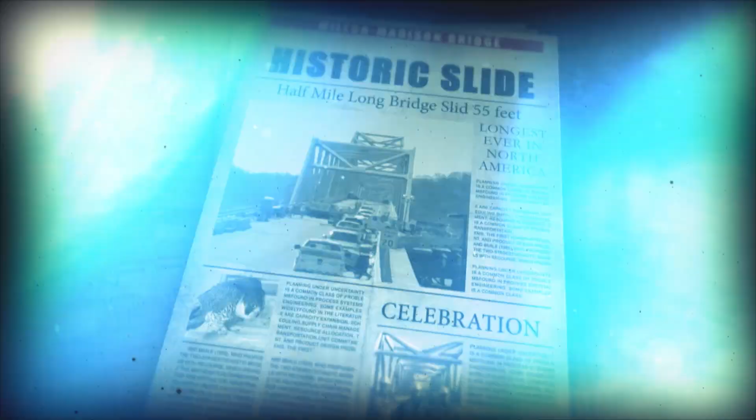Tucked below the limestone bluffs midway between Cincinnati and Louisville, you'll find one of the largest national historic landmark districts in America. Madison, Indiana was established in 1809 along the superhighway of the time, the mighty Ohio River. As the United States expanded to the west, commerce from flatboats and paddle wheelers grew Madison into a major transportation hub. Its wealth created investment in many finely built homes and businesses that have survived the several booms and busts of a river town economy.

Madison is one of the most important historic towns in the United States, on par with Savannah and Charleston, Nantucket, places like that. And you can walk around and just kind of immerse yourself in American history. It's all around. You can reach out and touch it in any of our historic buildings.

Founded in 1809, it has buildings as early as 1817, and quite a few of them from the 1820s to 1840s. Our Main Street has a beautiful collection of 19th and early 20th century commercial buildings. A lot of communities have lost historic buildings in their Main Street, and you get gaps, sort of like gap teeth. Not here.

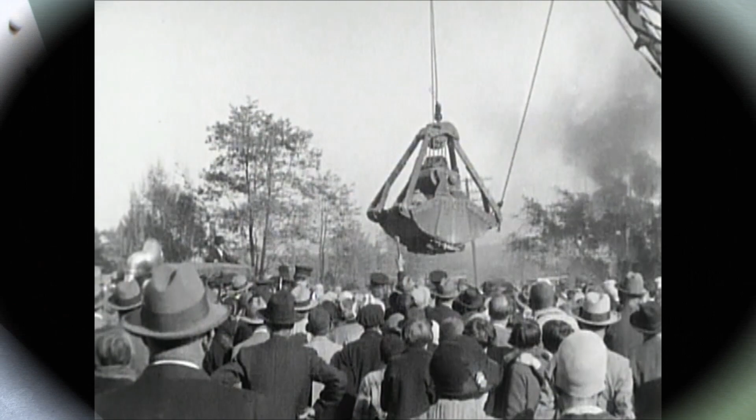200 years after its founding, and despite protections provided by historic landmark status, the future of Madison was threatened. The bridge connecting the community to Milton, Kentucky, its more rural neighbor across the Ohio River, was deteriorating rapidly and in desperate need of replacement. Prior to its construction in the late 1920s, ferry boats were the only way to cross the Ohio between Milton and Madison. The bridge opened to traffic with much fanfare on a cold December day in 1929.

100-year-old Riva Webster was there. There's the one. There's the one that we're on. Riva represented Milton in the Queen of the Bridge pageant and parade. Let's see, I was 16. I was in school. I was in high school. We were called the princesses. They let us call ourselves that.

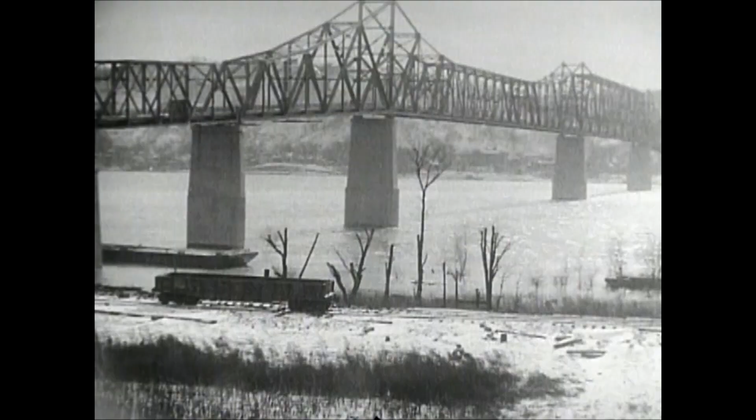We hung on for dear life, I tell you. It was snowing, and it's been snowing and sleeting. I can't even see how attractive I am because all I can see is just a little round face that was looking like this. But anyway, we had a good time, and it was wonderful. But we were miserable.

Throughout the following decades, the bridge created new opportunities for residents of both states. Madison enjoyed new customers for its retailers, restaurants, and theaters. And Kentuckians from Milton now had easier access to the jobs, goods, and services a larger neighboring town could provide.

Well, I grew up in Milton, Kentucky. I grew up on a farm, so I'm a Milton guy. Milton's a small town. Trimble County is very rural, a lot of tobacco grown there, a lot of farming. It's a great place to live and raise a family, but the two communities are very, very closely tied together for commerce, jobs, and for everything you can think of.

That's why this bridge is so important to Madison. I mean, if you can't get across here, you've got to go about 25 miles east to Markland Dam, or you've got to go about 35 or 40 miles west down the river to Louisville. So this bridge was very important to us.

By the 1990s, transportation needs had changed. Vehicles were wider, heavier, and moved faster and more frequently across the Ohio. The bridge that helped commerce flourish between the two states now began to hinder it. The condition of the bridge was deteriorating. Its functionality had been a problem for a long time.

It was built for horse and buggies and Model A's. And with the new cars and trucks especially, two semis could hardly pass without hitting mirrors. And it was becoming a big problem for industry, taking their goods and services north or south. The communities understood they were losing money economically. It was unsafe. It was a structurally deficient bridge.

For 2 decades, community leaders advocated for a replacement bridge at a time when money was becoming more scarce for state transportation projects. In the beginning, more than not, I was told, Jack, it's too expensive a project. It's a huge project for a small community to be successful with. And my answer to them was, it is, but we're going to work toward this.

Nobody likes to pay taxes. But most citizens understand that these are critical needs that our communities have. Everybody wants to travel on a good and safe road, but people want you to invest their money wisely, and I think that's incumbent on people like me, politicians who make these decisions, to say, let's go where the need is greatest, or where the opportunities are greatest for future growth, and let's make our investments there. And if we continue to do that, I think people will be more than willing to make those investments with their dollars.

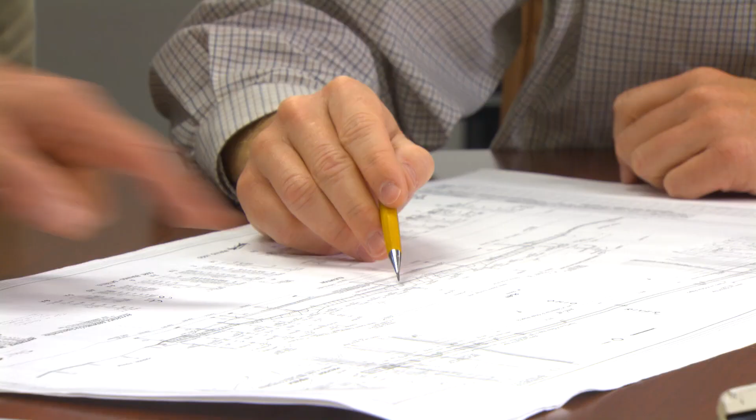Back in about June of 2008, Michael Baker got involved early on. We were the consultant on the bridge type selection and environmental study. That was the part of the project where you look at all the different alternatives up and down the river, try to figure out what makes sense, and there was a lot of community involvement at that point in time to figure out what the community's needs were.

In addition to transportation officials at the table and groups like Historic Madison locally, there was the National Trust for Historic Preservation, there was the National Park Service, and then there were local people who own historic homes and have businesses and investments in the historic district that also had the opportunity to participate.

We did not want to lose that designation. That was a key thought. We're very proud that we are one of the largest in the country, and we didn't want that to be damaged. We would alternate those public meetings, one on the Kentucky side, one on the Indiana side. So everybody felt like they had ownership and they had something to say about what we would have at the end of the day when the bridge was built.

In the midst of the design and planning of the replacement bridge project, the American economy suffered its largest financial crisis since the Great Depression. Banks and businesses failed, unemployment rates doubled. In an effort to stem the tide of further job losses, the federal government enacted the American Recovery and Reinvestment Act of 2009. The economic stimulus package included over $1.5 billion called TIGER Grants for shovel-ready transportation reinvestment projects.

As we were working toward the final throes of how do we pay for the project, we decided to jointly, the two states working together, submit a request for Tiger program funding, and we were successful to the tune of $20 million.

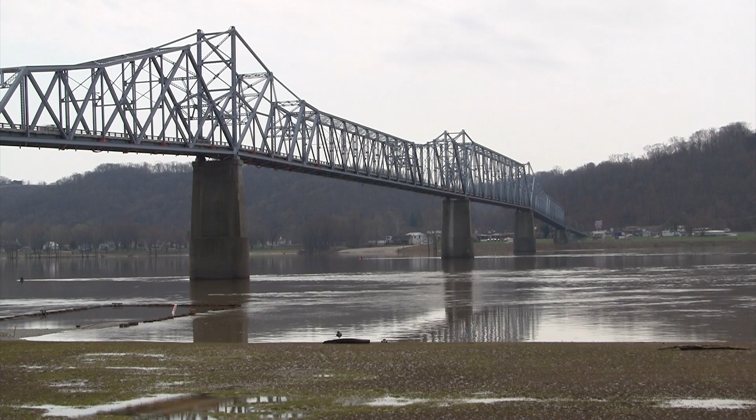A lot of times there's a lot of federal requirements that go along with these projects, and a shovel-ready project is a project that's already met those requirements, something they're ready to start the bulldozers moving and start moving the dirt. All those steps had already been taken. We'd already done a lot of the public hearings, environmental impact, the critical need for the structure to be replaced, so it all just lined up that we were ready to go.

The project needed to go design build in order to meet the requirements of the Tiger Grant. Essentially, it had to be substantially complete in 2012. A design build project is a little bit different than a typical bid build project in the sense that the design is not 100% complete when the contractor gets a hold of it. The theory behind design build is that the designer and the contractor come together to work out a more efficient way to do things.

Even though Kentucky was the lead state on the bridge, Indiana had a design build contracting authority, which Kentucky did not. So to help expedite the project, we were able to bid the contract and actually take ownership of that. So it was a cooperative effort between both states in that we were able to do something at that time they couldn't. So we stepped up and helped them through that process.

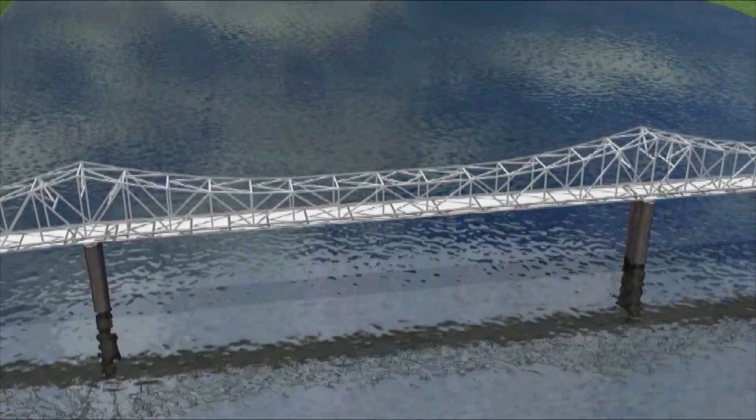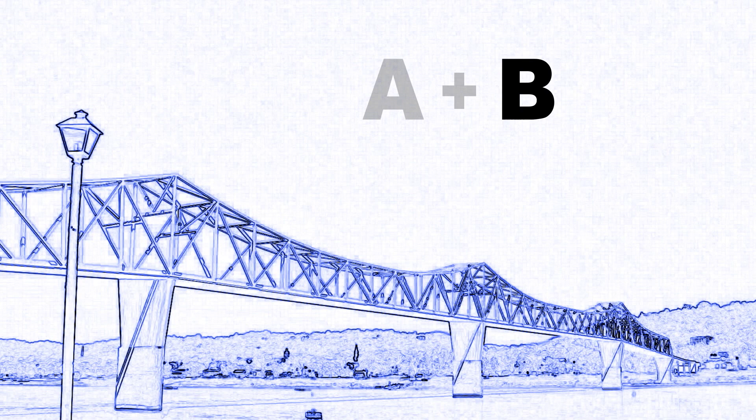By 2010, enough of the design was in place to receive bids from potential contractors. The winning bid would be selected using the A+B evaluation technique. The A portion being the cost of constructing the replacement superstructure while rehabilitating the 1929 piers underneath. The B portion of the bid would include a per-day bridge closure value of $25,000, limited to 365 days of total closure. So it was very important in this bid to get the least amount of closure because it would be the least impactful for the motoring public and the communities on both sides.

It is crucial in a historic town or a historic building that it be used and that it be active and that whatever goes on happens continuously. 18 months of closure, maybe half of the market could not get here. They might permanently lose customers. We were terrified about that possibility. We thought that was very frightening.

We had 5 bidders on the project, and of the 5 bidders, there was only one that chose to bid less than the 365 days of closure. That contractor was Walsh Construction. It was a joint effort between Burgess and Niple, their subcontractor Buckland and Taylor, who took care of the truss design, and Walsh Construction that made up the design build team.

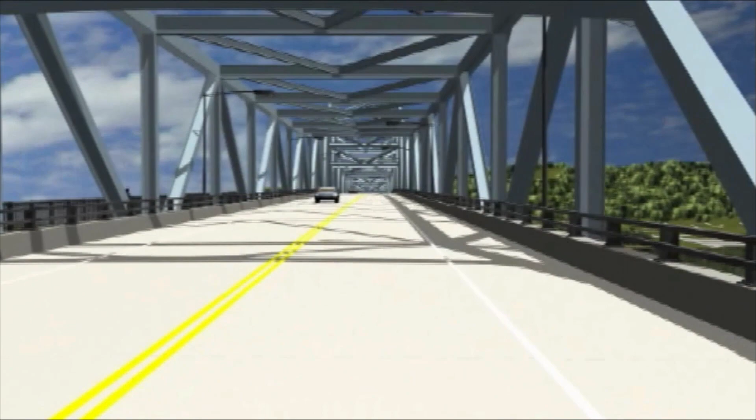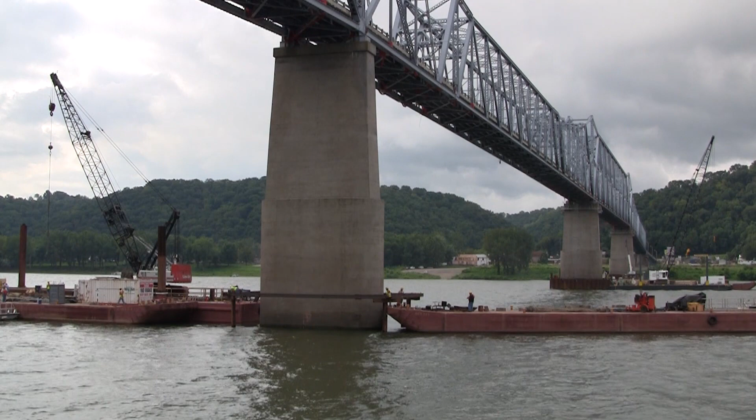An innovative plan was proposed by the Walsh team. In order to maintain a flow of traffic throughout construction, a new superstructure would be assembled on barges along the shore and then lifted onto temporary piers alongside the existing bridge. The 1929 span would remain in service while its piers were strengthened above and below the Ohio River.

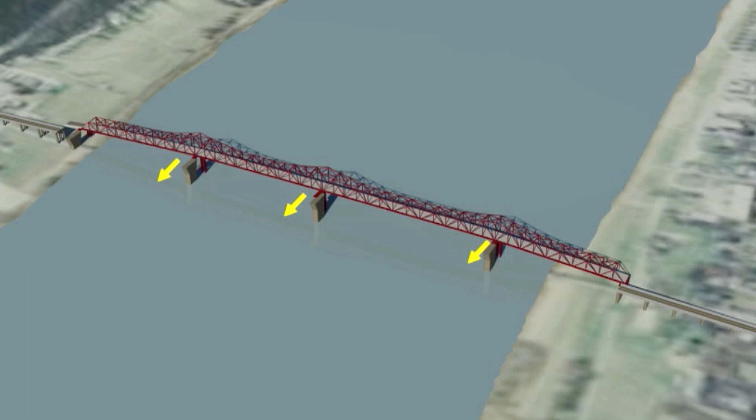When the new truss and approaches were complete, traffic flow would switch to the new bridge and the old one removed to make way for widening of the original piers. Most surprisingly, the team planned to slide the nearly half-mile-long bridge more than 50 feet onto those rehabilitated piers. Engineers called for the Ohio River crossing to be closed for only 10 days during construction.

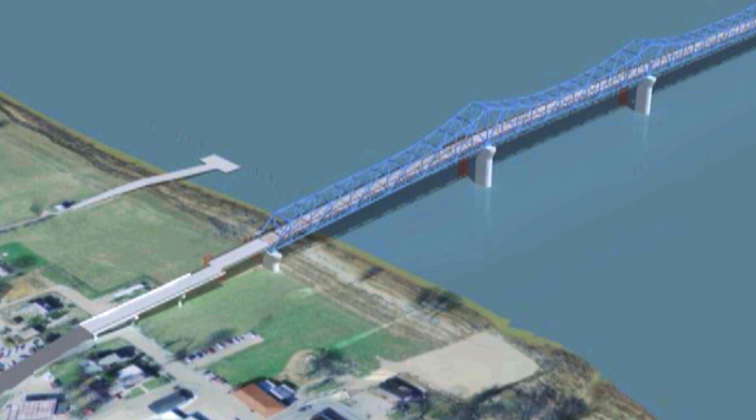We were anticipating a year-long closure. We couldn't believe it. We were ecstatic. I think from an economic standpoint and the local communities, it benefited them the most by doing it this way. And it got us the job, obviously.

With the winning bid in place, ground was broken in the fall of 2010. National Transportation Secretary Ray LaHood traveled from Washington to Madison to join local and state dignitaries in turning ceremonial dirt.

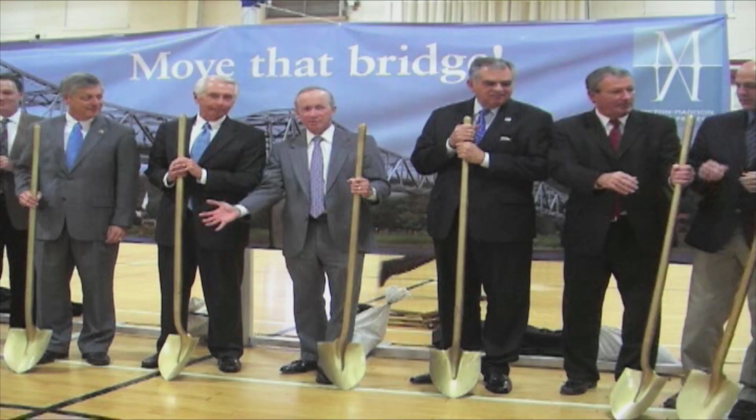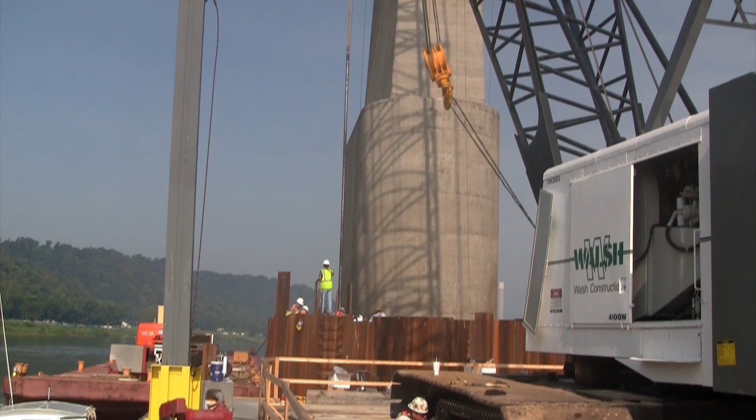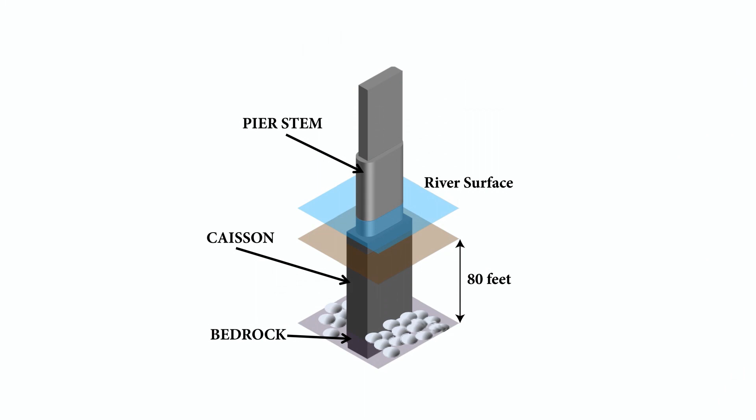The first construction challenge was to rehabilitate the existing 1929 piers. Although solidly constructed, there were problems below the surface. The biggest deficiency of the piers was the fact that the part below the river, which extended about 80 feet down below the river bottom all the way down to bedrock, was unreinforced. And in today's standards, that is just unheard of. And when you actually run the numbers for wind on the bridge or a barge hitting the bridge, it just doesn't work.

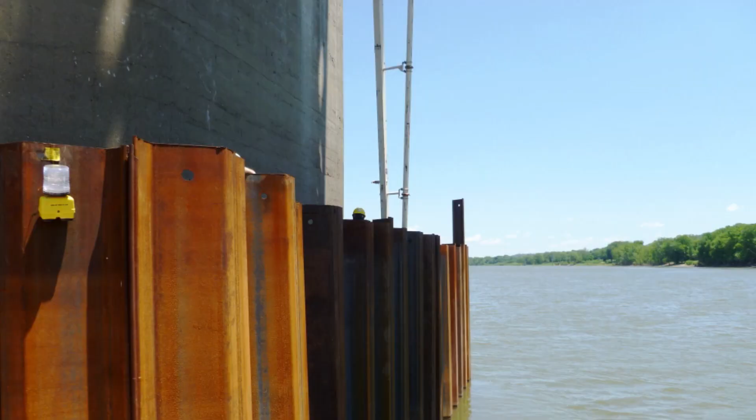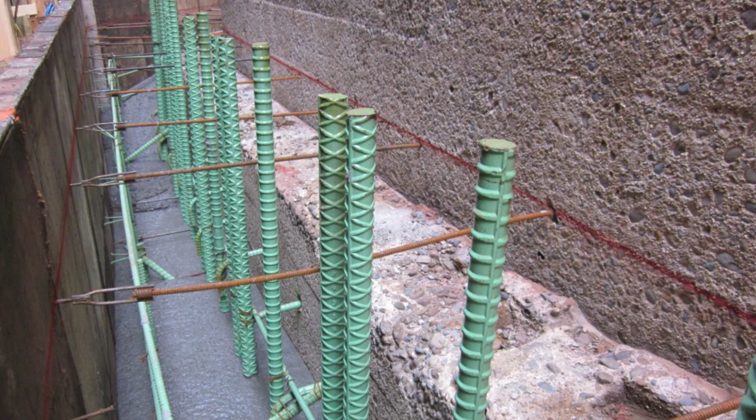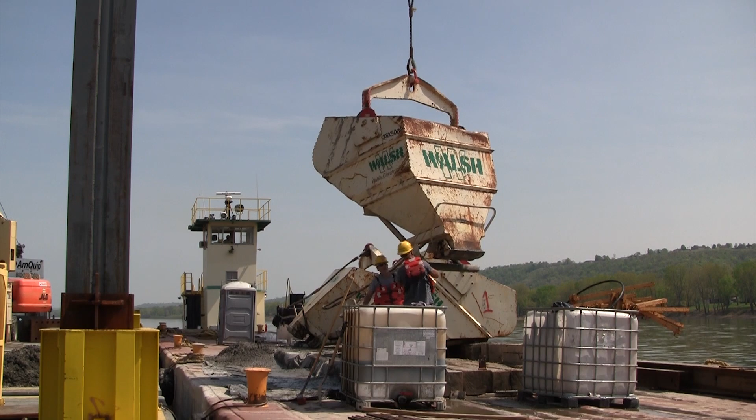Cofferdams were used to expose the 80-year-old pier caisson on the river bottom. Workers drilled holes up to 70 feet deep and inserted bundles of steel rods to reinforce and strengthen the perimeter of the pier's foundation. Additional reinforcement was also added to the pier stem, which reaches out of the water to meet the roadway. Considering you're in the middle of the Ohio River under wet conditions, it's a challenge.

We experienced 8 flood events in the first 14 months of this project. 2011 was the wettest year on record up the Ohio Valley. We really think that we lost in workable days close to 250 days the first 14 months of the project.

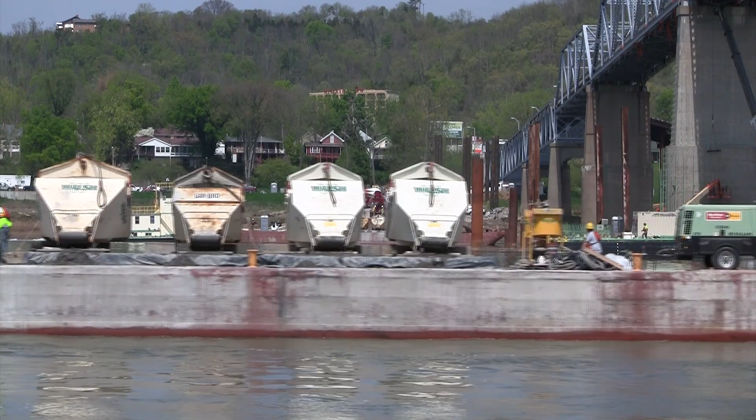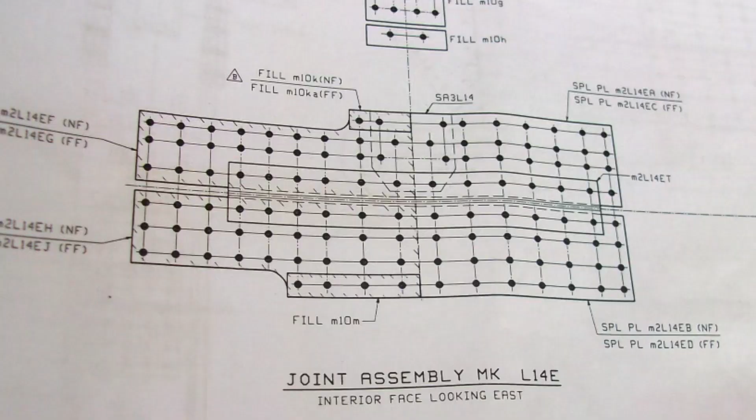Simultaneous to the pier strengthening, work began to design and construct the replacement truss superstructure. As soon as you win the job for a design build project like this, it's all about the time. So that means that right away the contractor's asking the designer, what are all our plate sizes? We haven't designed the thing yet. So a huge amount of effort went into the first couple weeks of design to pin down how long and how thick and how much steel plate you needed for this bridge.

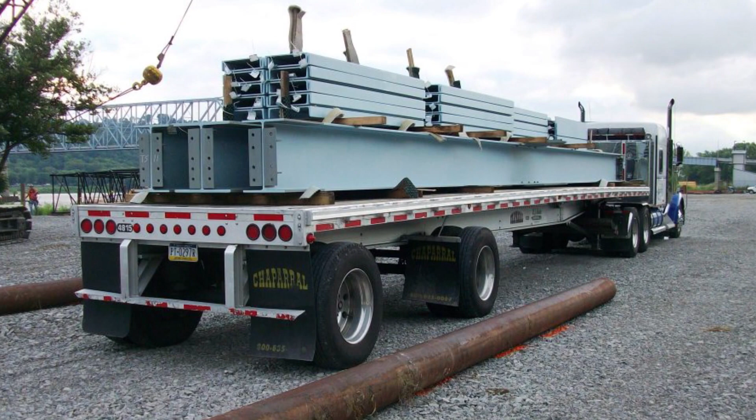Once the steel began arriving in summer 2011, the 2 longest segments of the bridge truss were assembled on barges linked together along the riverbank in Milton. A 600-foot-long assembly was then floated into position and lifted 90 feet above the water using a technology called strand jacking. A series of computer-synchronized hydraulic jacks pulled upon strands of steel cables attached to the 1,700-ton truss. The jack's mechanism alternates clamping and extension cycles to raise extremely heavy loads with precision control.

You just have to be really precise, and you know, the old joke in the industry, we're building a bridge, not a watch. Well, in this case, we had to build a watch to make it work. We want to have this bridge sitting on this temporary pier, and we want to be able to slide it onto the rehabilitated pier. That was what we needed in the end, but before we got there, we had to somehow lift this whole thing and then put it down on something. But we couldn't have anything there to put it down on because we had to lift it past all of this. So the two construction methods were completely at odds with each other.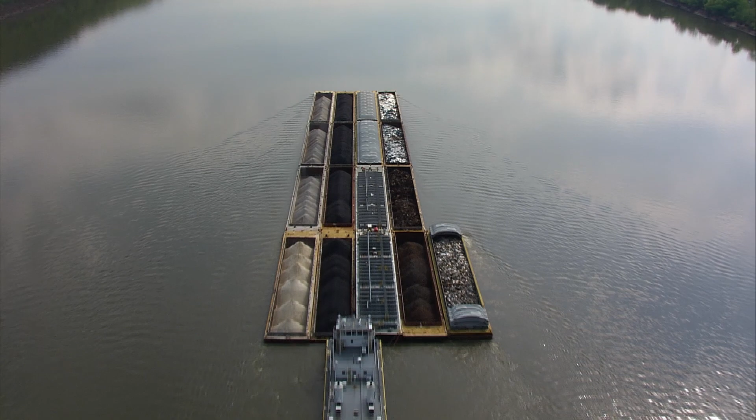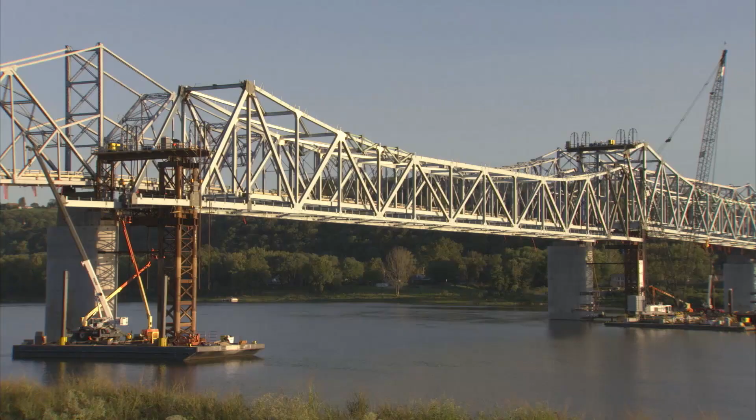Adding to this dilemma were the time constraints of closing one of the busiest inland shipping routes in the country, the Ohio River. At 727 feet, the longest truss segment traversed the Ohio's navigable channel. In less than 24 hours, we had to have the river back open. So we had a process where we lifted that up, and then the crane brought in this massive sliding girder, which itself was 100 tons. And then once it was in place, we were able to lower the truss, let it sit on it, and then we could get the crane out of the way and go and open the river.

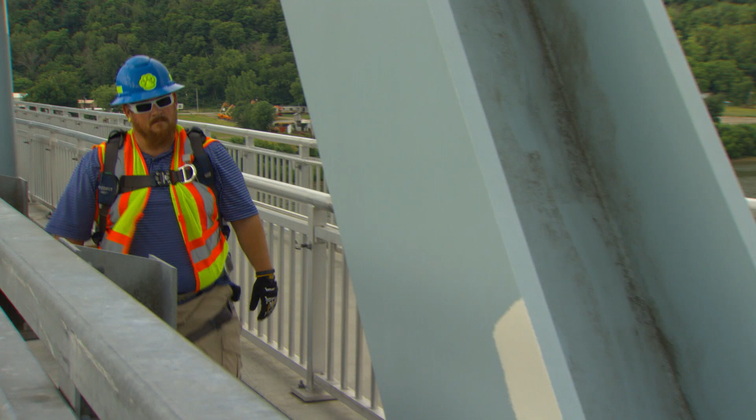Construction of the remainder of the truss continued throughout 2012, all while traffic remained flowing across the original 1929 bridge. Due to the long-term nature of the project and their familiarity from work done in the development stages, engineers from Baker International were chosen to supervise construction. Baker was hired to oversee the project on a daily basis, to do construction inspection, to make sure that the contractor was following the plans, making sure we were getting the product that we were paying for. Baker also placed people on site to manage the project.

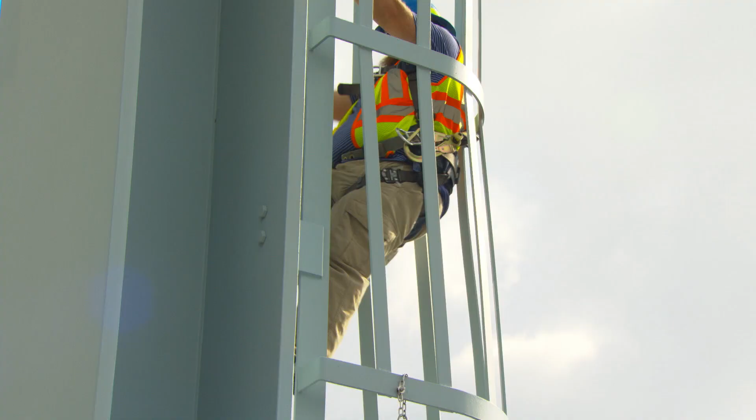So Larry Collins actually works for Baker, but he worked as an agent for INDOT. And when I worked with Larry on a daily basis, I saw him as INDOT. Collins is a Trimble County native who'd recently settled with his family in Madison's historic district when the bridge project was announced. I worked in Bedford, Kentucky, Trimble County, so I knew I'd be impacted by the bridge project. Being my lifeline to get to work, all the family lives in Trimble County, we live in Madison.

I was ecstatic that I still have the bridge. I can still traverse back and forth across the river and only be closed for the short duration. So both things just excited me, to be working on it and being in the community. It was vital to have that bridge open.

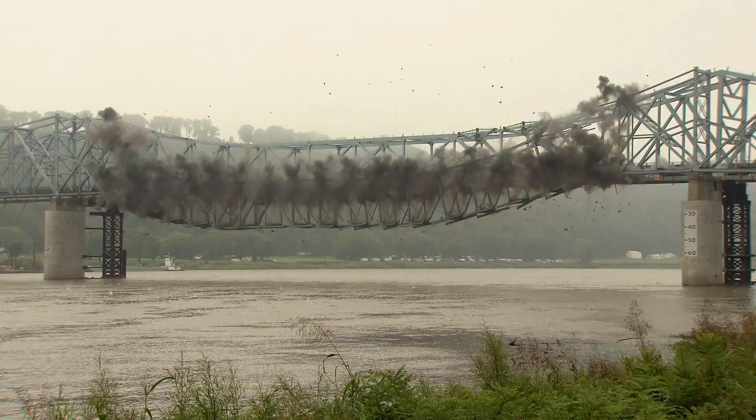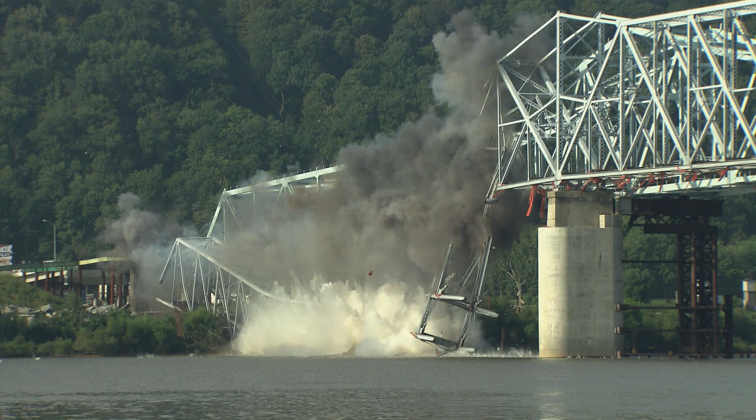The project's next phase, removing the 1929 bridge superstructure, proved to be the most visually spectacular. Once the concrete was completely removed, using explosive demolition cutting charges, it's a process of just moving along in a certain order to bring it down. Yeah, we were 15 feet between bridges. So for the most part, it did pretty good. We had a few little nicks here and there, no structural damage whatsoever.

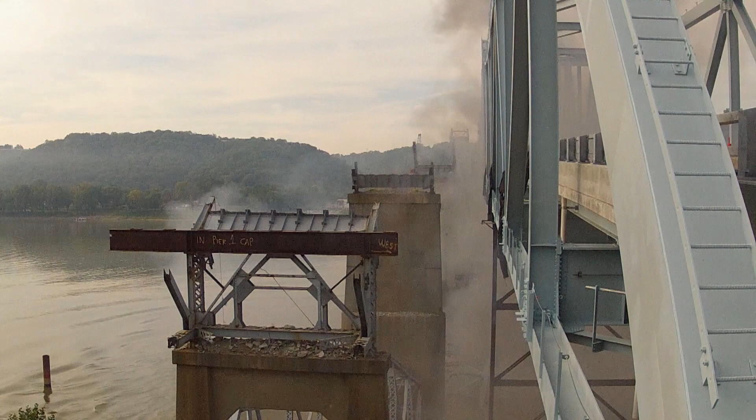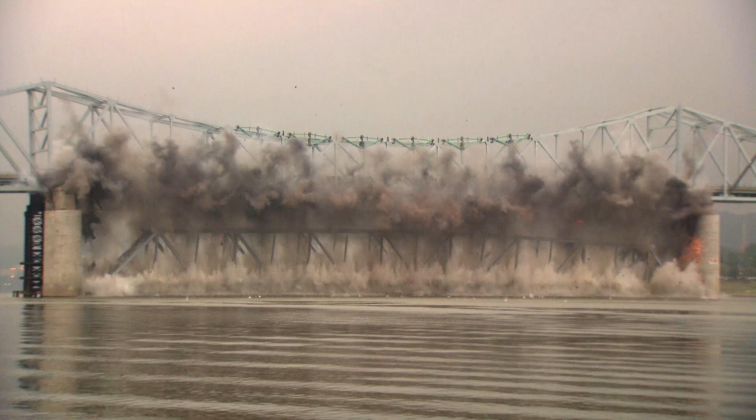Along with guarding the new bridge from damage, the project team partnered with Kentucky Fish and Wildlife biologists to protect a family of rare peregrine falcons who had chosen the bridge as a nesting site. The female at that point in time, I think she was on young chicks. She definitely noticed. She kind of got up and looked around, and I think she may have thought a thunderstorm was coming because she just hunkered back down on the chicks, and everything was okay.

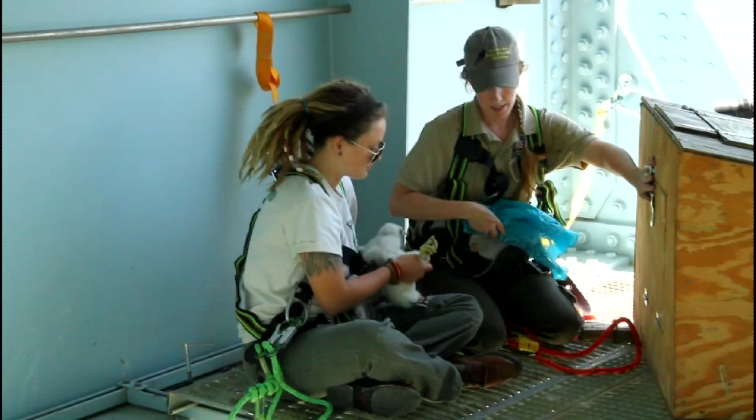With just 13 peregrine falcon pairs in Kentucky, losing the Milton-Madison nesting site would be a major setback to the species' recovery efforts. I am sure at the beginning Walsh was wondering what this meant for them, but as time went on, we found that the company really fell in love with the birds, and they went from being cooperative to really going out of their way to accommodate these birds. And actually every single year that the bridge has been reconstructed, there has been successful nesting on the bridge, so it worked out great.

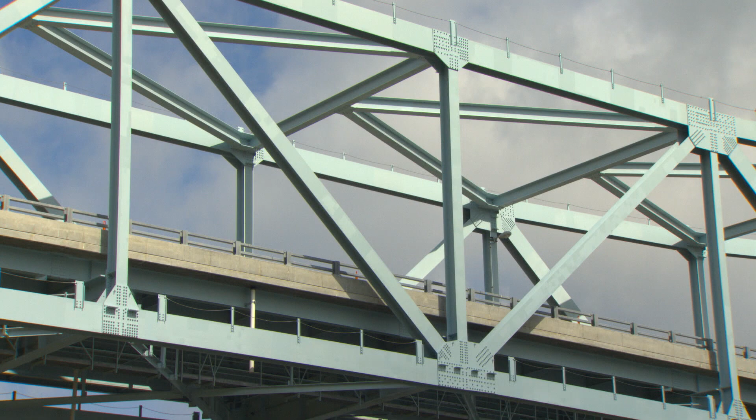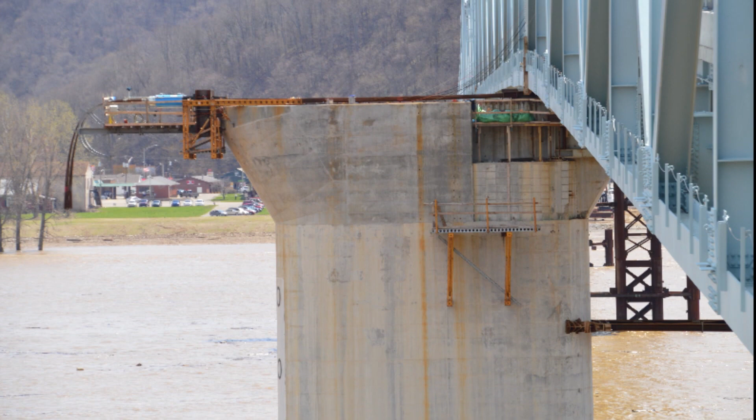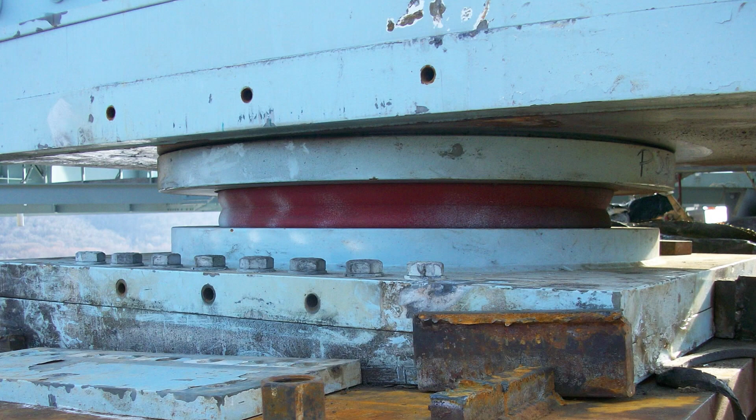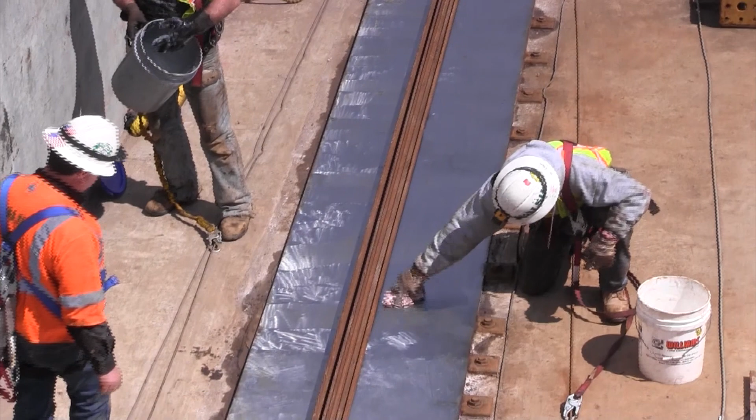As falcon nesting season began again in early 2014, preparations were already underway for the final construction milestone. The 2,400-foot superstructure, which is nearly half a mile, would be slid laterally more than 50 feet onto the newly widened caps of the rehabilitated piers. Engineers plan to utilize the same hydraulic strand jacks as were used to lift the pre-assembled trusses onto the temporary piers. This time mounted horizontally, the computer-synchronized jacks would pull a harness strapped to the truss bearings. These bearings basically allow the bridge to move as it expands and contracts with temperature variations. The bearings would slide on a lubricated Teflon pad across a polished steel surface, carrying with it the 30 million pound bridge.

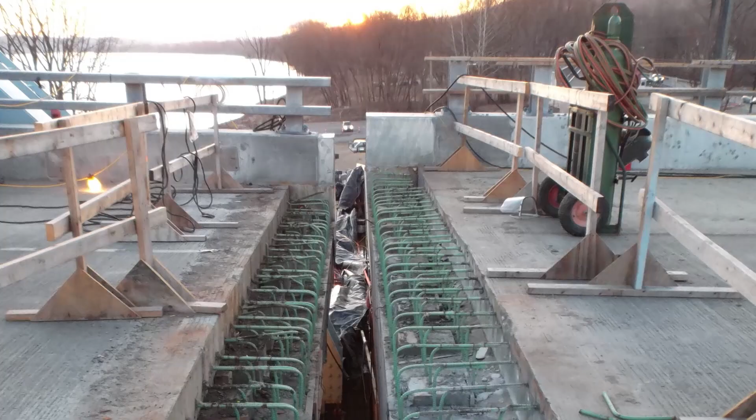During installation of the harness and just days from commencing the slide, the crews encountered a setback. The base plate, the lower pad, slipped out during that process, allowing the bridge at that corner to drop 10 inches. Well, obviously at that point we had to close the bridge down, something we didn't want to have to do by any means. For the first time, area motorists faced an extended bridge closure and an hour-long detour to reach the opposite side of the river. Had the bridge been replaced by traditional construction methods, the communities would have had to endure such a detour for a year or longer.

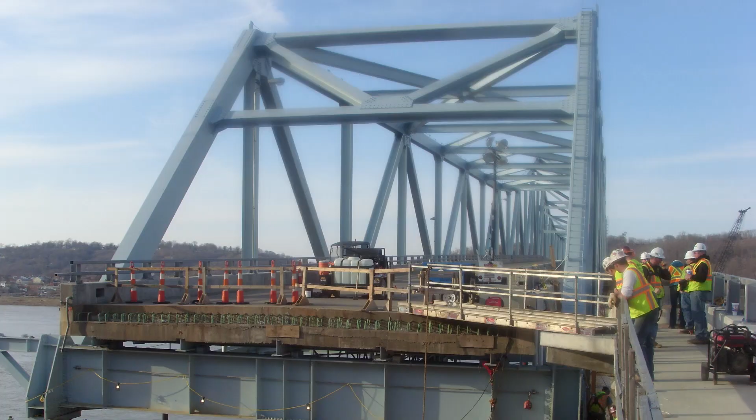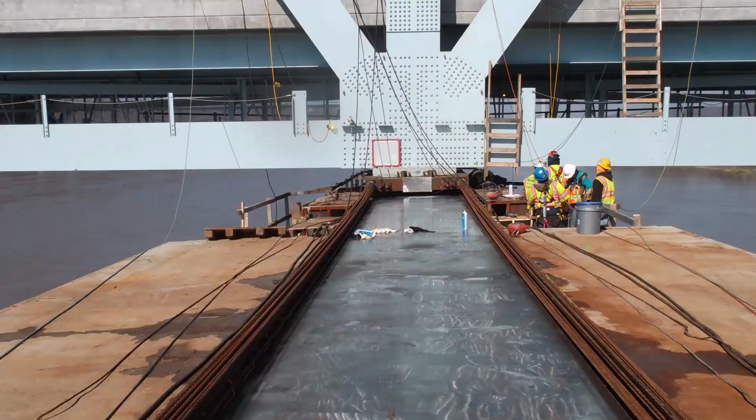I would like to say, oh, we'd have made it through that, and we would have, but it would have been terrible. We would have had a lot of our downtown businesses closing. It would have been pretty devastating to our community. So, working together with our designers and working around the clock, we were able to reestablish that piece back in 12 days. And then to ensure that we had no more problems with the harness system, we took a few extra days, with the bridge still being closed, we knew it was an inconvenience, to make sure that we would not have any issues during the slide itself.

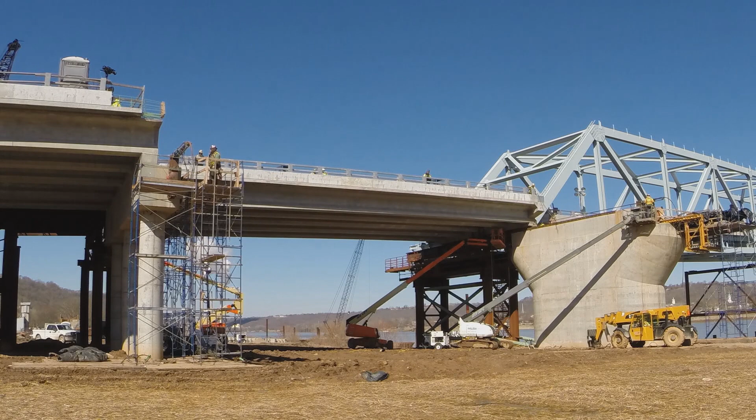With the bridge still closed to traffic, a 100-foot approach section of finished roadway was slid into its final position on the Milton shoreline. But this was just a precursor for the historic slide, the placement of the nearly half-mile-long superstructure. Sliding a bridge is typical in this industry, but not to this scale. And sliding a truss this big seemed difficult to everybody but VSL Corporation, the people that specialize in lifting and sliding. And they always looked at it as just another day at the office.

Everything worked so well that the anticipated coefficient of friction between 8 and 15% ended up about 3% during the slide. With lower than expected friction on the sliding girder and with tailwind gusts of up to 30 miles per hour, sliding operations were halted after moving almost 1/3 of the distance to the refurbished piers. The bridge started wanting to move on its own. And when I say it started moving on its own, we were talking quarters of an inch.

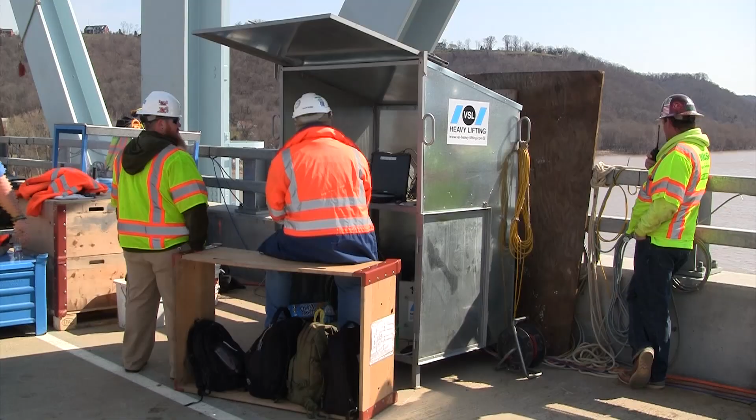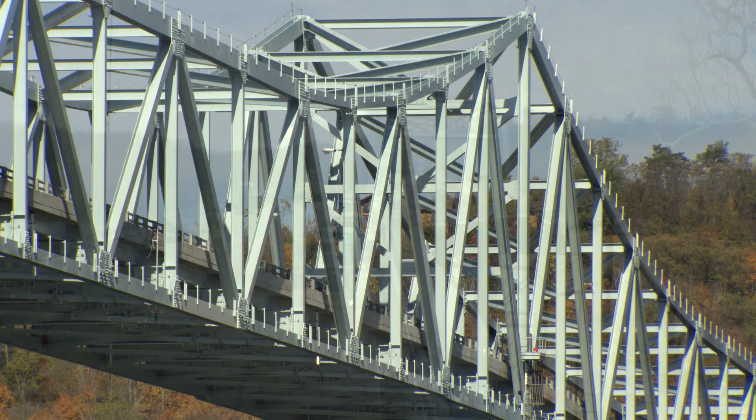But when you have a company out there that has promised to keep it in a line to within 3 millimeters over 2,400 feet, a quarter inch gets to be worrisome. And people say, oh, come on, the wind can't blow that thing sideways. Sure it can. If you think about the square footage of exposed surface of the truss out there, it's a big sail. By the next morning, the bridge was on the move again, with a system in place to control any unwanted push from the Ohio Valley winds.

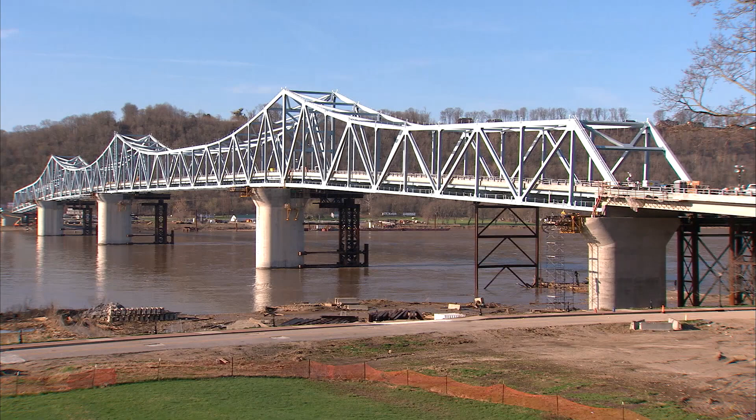For those of us who got to actually be on the bridge during the slide, unless you had a visual reference, you could not tell you were moving. The nesting peregrine falcons could attest to the smooth journey. They were sitting on eggs while the bridge was moving. They were actually riding the bridge and nesting at the same time and didn't even break an egg. And so, on April 10th, 2014, the nearly half-mile-long, 30 million pound bridge connecting Kentucky and Indiana finished its journey, completing the longest bridge slide ever attempted in North America and perhaps the world.

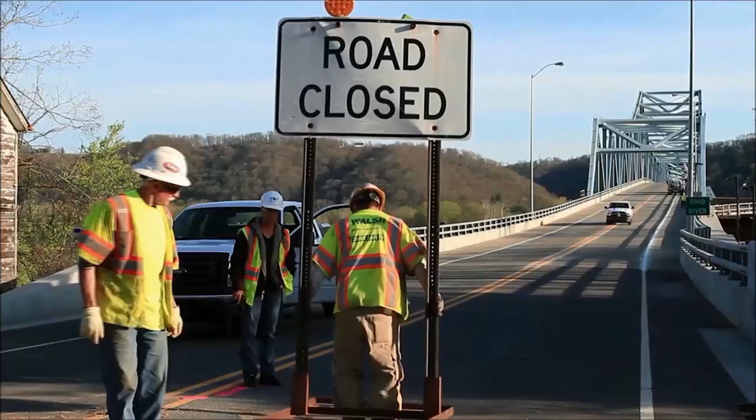1 week later, the Milton-Madison Bridge was reopened to traffic, perhaps without the same fanfare as the parade in 1929, but definitely with the spirit of welcoming back an old friend. It's history in the making right now. This is a great day for everything we do, for our commerce, for the people who work here and the people who live here and work on the other side of the river, for people who have friends and family on both sides. This will save everybody a lot of time and a lot of money.

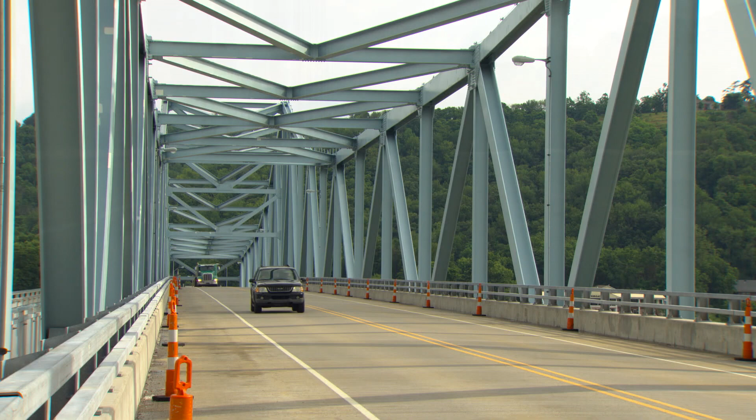The new bridge fits in. If you had never seen the old bridge, you might not know that it's actually a new bridge. Well, and that's kind of our guideline as preservationists. We like to see things in the historic context to be compatible in materials and, in this case, form. It's very open, and you have the sidewalk that we didn't have before. If you tried to walk across that bridge before, you wouldn't have made it. It's really important, I think, for citizens to see that not only can we work across state lines, we can work across political lines to get these important infrastructure projects built.

In the fall of 2014, the governors of both states gathered with those who worked diligently to see this project through. They celebrated what many said couldn't be done because it was either too costly or politically difficult. And I want to thank Governor Pence, who's here today, Governor Daniels, who couldn't be with us, for joining hands with me and making this happen. We have demonstrated across the mighty Ohio that in Indiana and Kentucky, a brighter future is possible when we work together. The citizens came together as well. And when those voting members of communities make their needs heard, then those that are in office listen.

So I think when you look at innovation, I think anything's on the table, and I think you owe it to taxpayers to be able to say we did the best with your project that we could and to deliver it on time and on budget. I think the public needs to see projects like this and have a little more faith, a little more trust that there are very capable engineers and the engineering community out there who are willing to transform our aging system into something, again, that America can be proud of. That bridge is the highlight of my career that I'm most proud of. And it's not proud because I done it, but I'm proud because we had partners. All came together, and when you do that, great things can happen.